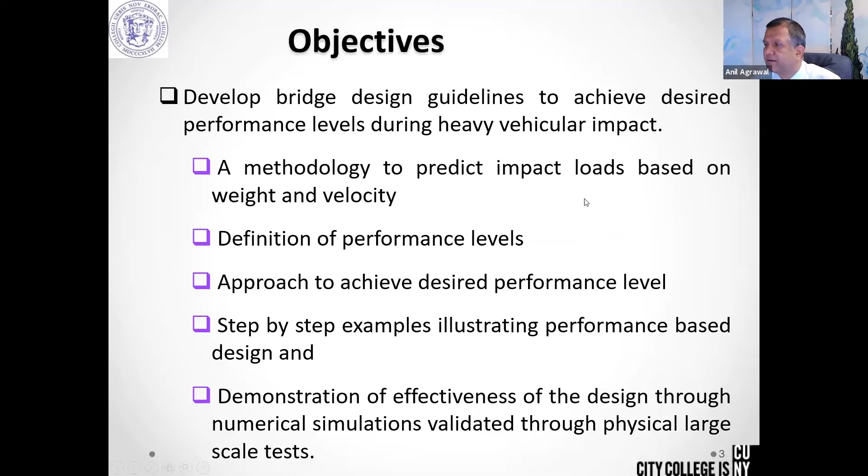But let's look at what exactly the vehicular impact is. So we design the bridges for gravity and live loads. But sometime in its life the bridge is subjected to one of these extreme loads, hydraulic, overload, collision, earthquake, and this may lead to failure of the bridge. Now, if you look at all the causes of failure in USA in the last 20 or 30 years, then of course hydraulics is the biggest one. We do a lot of work on seismic, but there has not been a major earthquake in the US. So damage to bridges because of seismic has been much less actually.

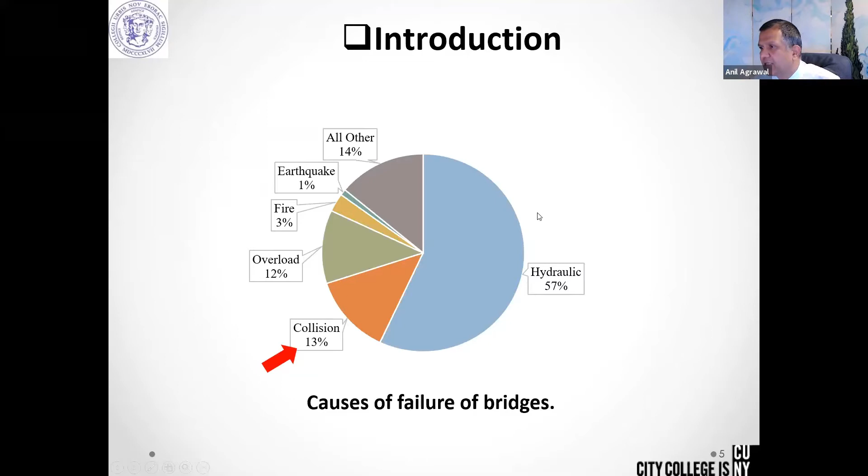All others are 14%, but if you look at the specific cause, then collision, the collapse of a bridge because of collision, is actually one of the leading causes, in fact, prominent causes. Overload is of course another cause, but collision is one of the leading causes of bridge collapse.

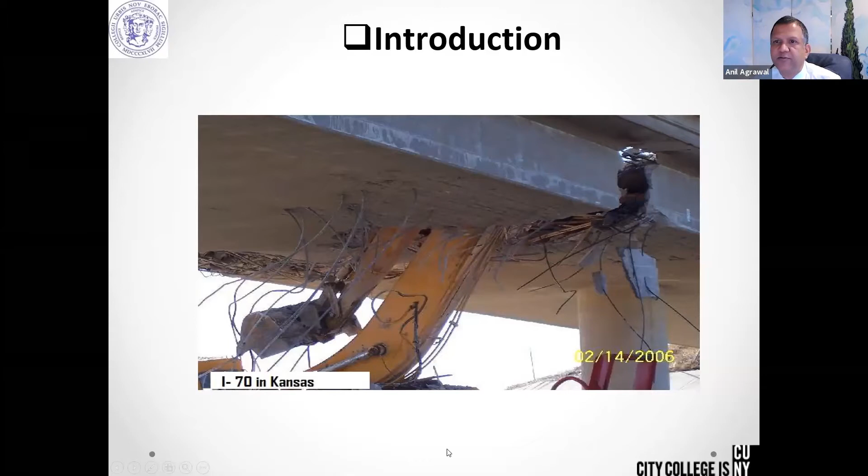So if you really have to cut the deck, this is a good technique. You can just chop the deck from one end to another end. You can imagine the amount of force and effort you will need if you want to really cut the deck. You can see from the top how far it started from one end, almost cutting the deck.

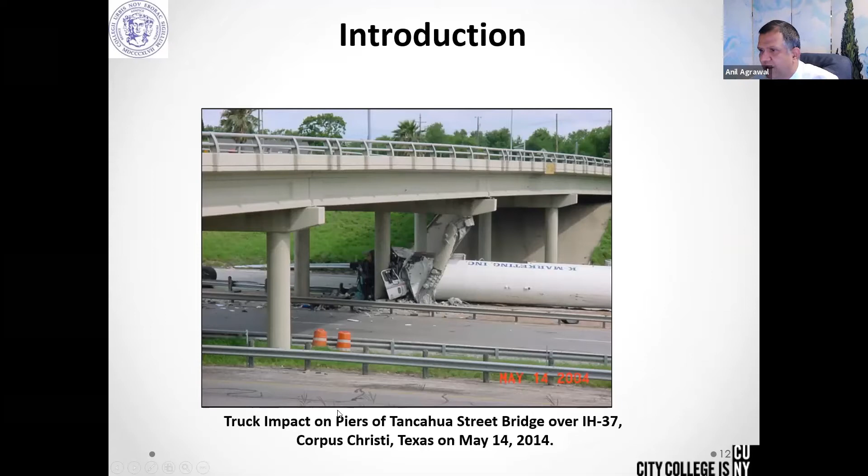Another example where the tanker truck hit the bridge pier. You can see one of the piers is gone, the trucker is gone. Unfortunately, I don't think the driver survived, but the bridge was intact - the bridge did not collapse. It has enough redundancy in terms of continuous girders and other things that it could survive. This was in Texas on May 14, 2014.

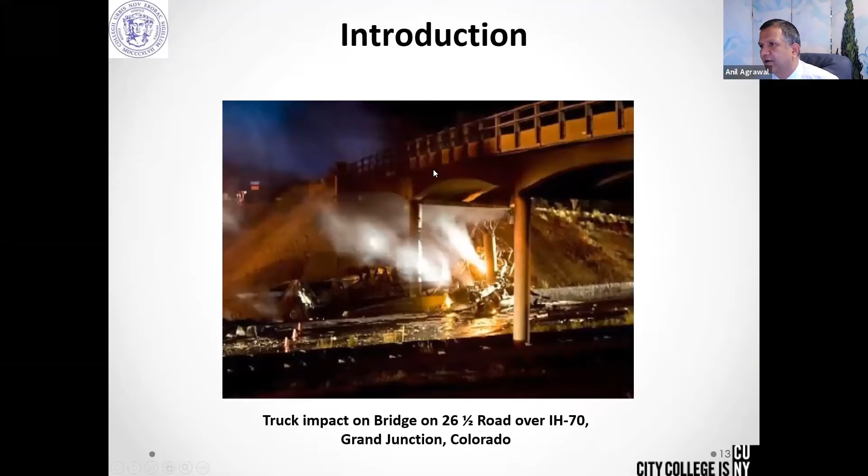This is another example with the fire - the truck burned down. You can see this pier completely damaged, but apparently the bridge has enough alternate load path and capacity that it didn't actually collapse.

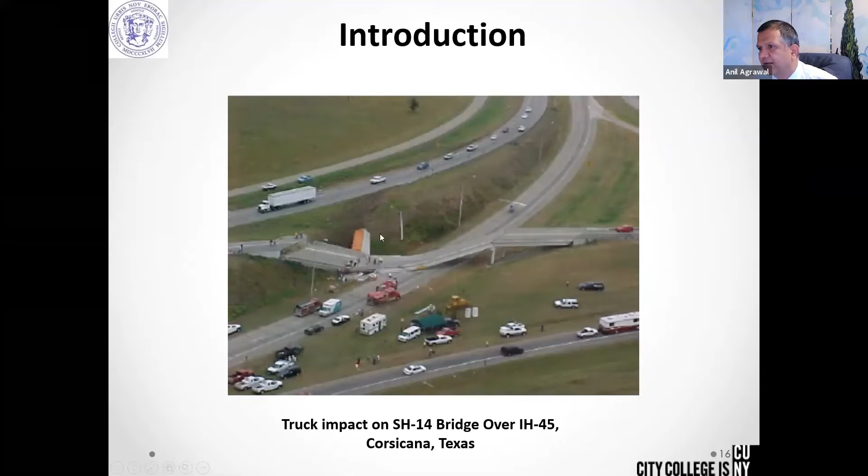Another example in Texas - a lot of these incidents are in Texas where you have high speed and isolated roads. So you can see another example, the truck hit it, and the bridge completely went down.

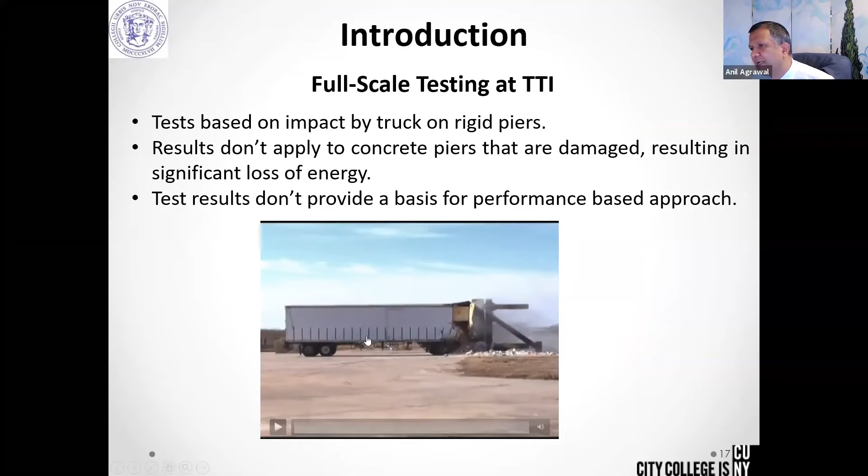To study the vehicular impact, there was a test done at TTI in 2010, and the idea was to find the type of impact force that might come. This truck was actually a tractor semi-trailer truck, but the pier was completely rigid, made of steel. The idea was to find exactly what level of force the bridge pier should be designed for. You can see the two types of impacts.

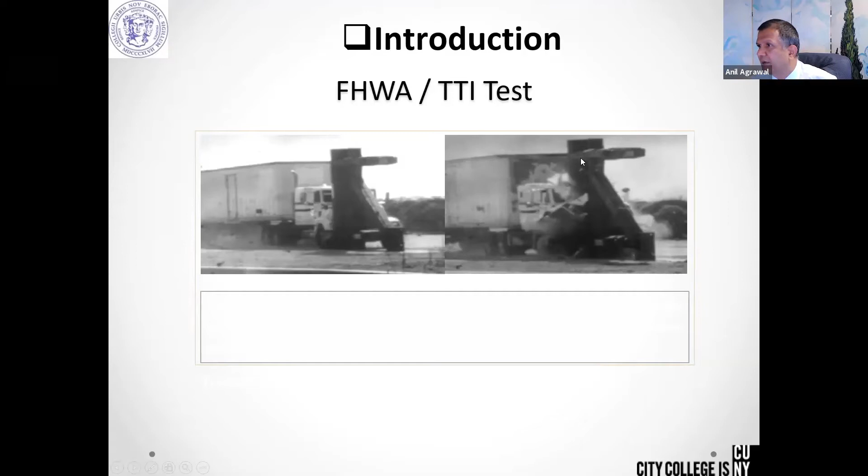First, the bumper impact - the bumper hits the bridge pier, and then once the bumper is done, the trailer comes with 80,000 pounds of force. The speed is low, but the trailer comes and squeezes the bumper and engine between the pier and the trailer. 80,000 pounds, moving very slowly, but really squeezing - applying a massive amount of pseudo-static force on the bridge pier.

Based on the testing, they found some data, applied some filters, and concluded that you can design the bridge pier for 600 kips. But this 600 kips is completely blind in terms of not considering the speed of the truck or weight of the truck or any other factor. It just blindly says design for 600 kips applied at 5 feet height.

In reality, you know that if you have a very heavy truck versus a light truck, or a high speed versus a low speed, the level of damage will be different. If a roadway has a 40 miles per hour speed limit, then there's no reason to design that roadway for a 70 miles per hour impact - that would be an uneconomical design.

So with that in mind, the Federal Highway invited us to work on this problem. I think this was way back in 2014. But before that, in 2012, my first PhD student did his PhD on this medium weight truck. Unfortunately, his work was never published because I had some doubts about the simulation and how accurate it was. There was no clear-cut calibration, so I held on to his thesis and said, well, publish in the future.

So our initial work in 2012 was actually for a medium weight truck, but then starting in 2014, we started working on a heavyweight truck. This is a model of the truck that you saw earlier in the video at TTI - it's exactly the same truck.

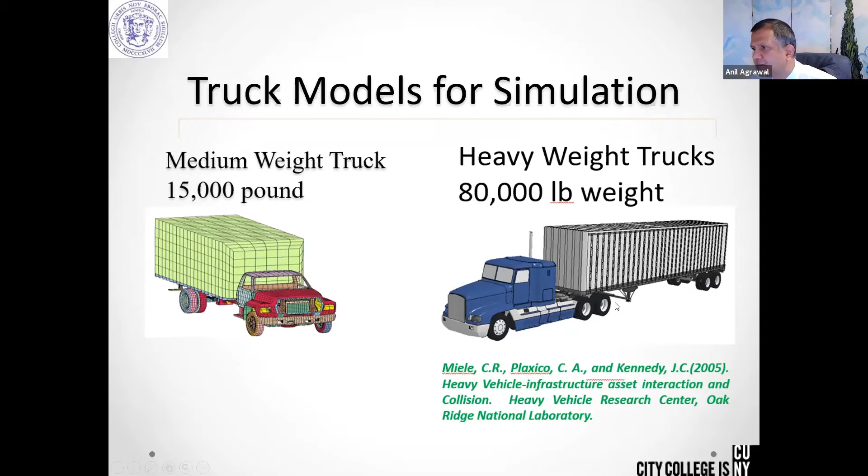Out of that, the primary mode of failure is actually shear failure, the most dominant mode during the accident. This massive amount of shear causes the bridge to fail. If the bridge piers are not designed appropriately for shear, then it will not survive.

We did all the work in LS-DYNA. In LS-DYNA, the material model is important. We use two material models for concrete. We use MAT 159, the continuous surface cap model. This is a damage model where you can simulate the deformation and failure of the concrete. This was developed specifically for this impact problem.

And for the steel, we use MAT 3, which is a kinematic plastic model widely used to simulate isotropic and kinematic hardening plasticity in steel. It considers rate effects again. This cap model also considers loading rate effect. So these are the two models we use.

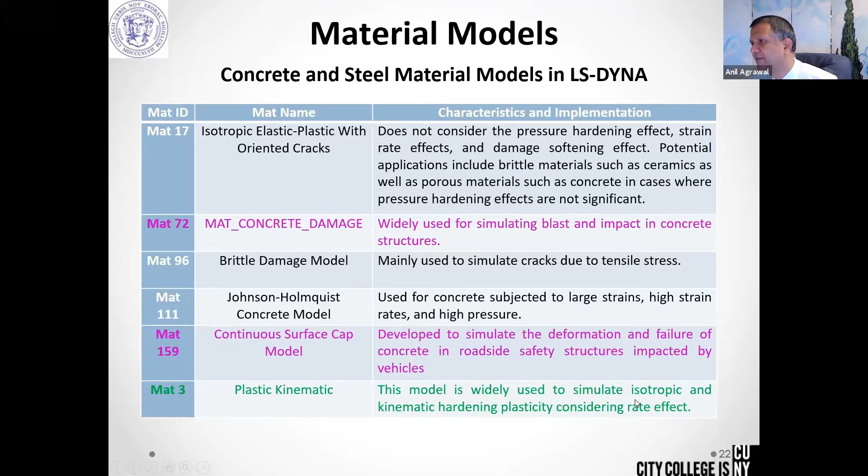We have a lot of calibration for these two models, which I'm skipping in the interest of time. But I want to show you one large scale testing that we did two years ago at the Federal Highway Outdoor Laboratory in Washington, DC. It's called FOIL.

Here, this is a large pendulum system where we built this three pier bent system. The idea was one is weak, one is strong, and we come and impact the pendulum - this is a 2-ton pendulum. We impact the pendulum to the pier, and then see the response. The idea is to take this to LS-DYNA and calibrate and see how well our test and simulation match.

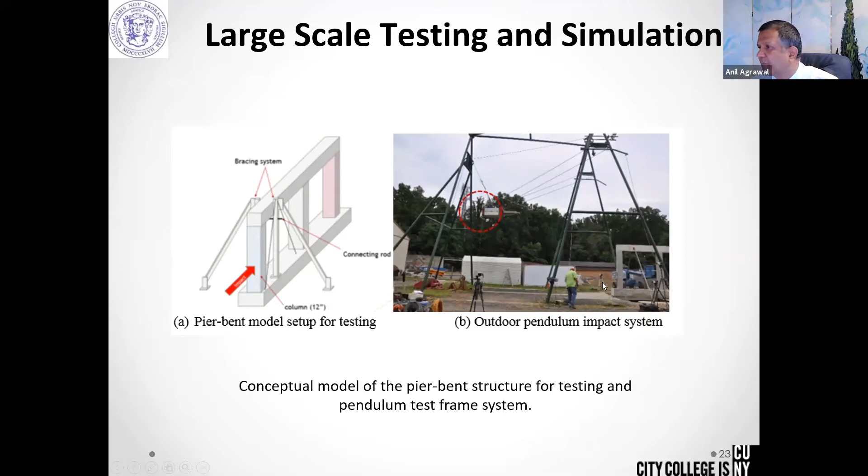There's a paper in Engineering Structures that was published recently. It discusses in detail about this work.

So here, this is the large scale testing and simulation. This is the design impactor. So before designing the impactor, we took this single unit truck and impacted it on the same frame.

So this is the testing setup. We put the testing here, anchoring everything. We also had a lot of strain gauges and high-speed cameras. I'm not showing the result for the strain gauges because some of them in the impact area broke, but some gave very good results. Those are in the journal paper.

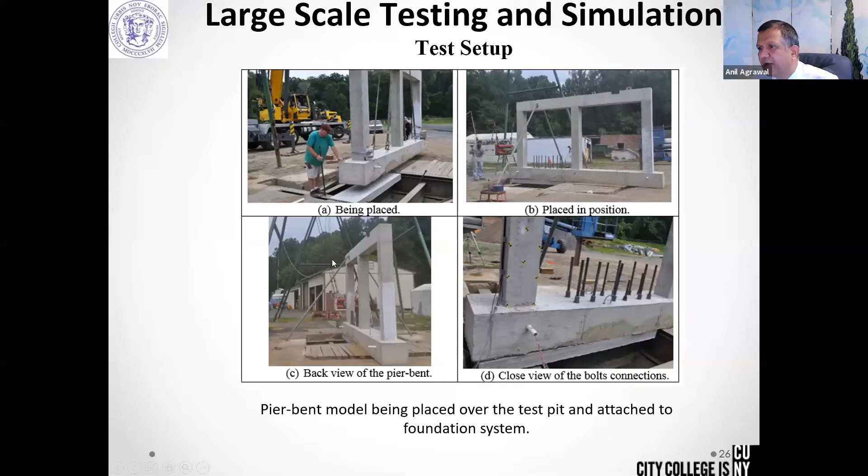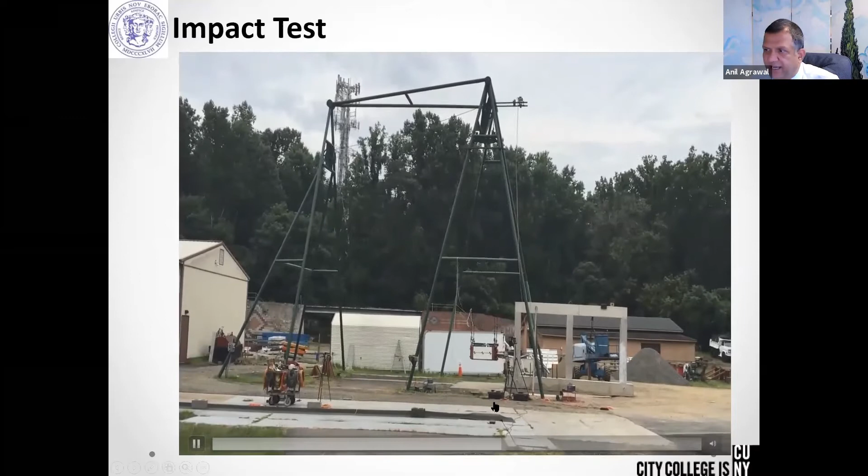But we had a lot of high-speed cameras where we could actually capture the deformation profile exactly. So this is the setup of the field test. When this comes and hits the bridge pier - that is the pier bent system - this was a test costing more than $70,000, two years of work for 30 seconds of action.

But we learned a lot from this one. We took this model back to LS-DYNA. We built the model in LS-DYNA - the impactor - exactly the same way.

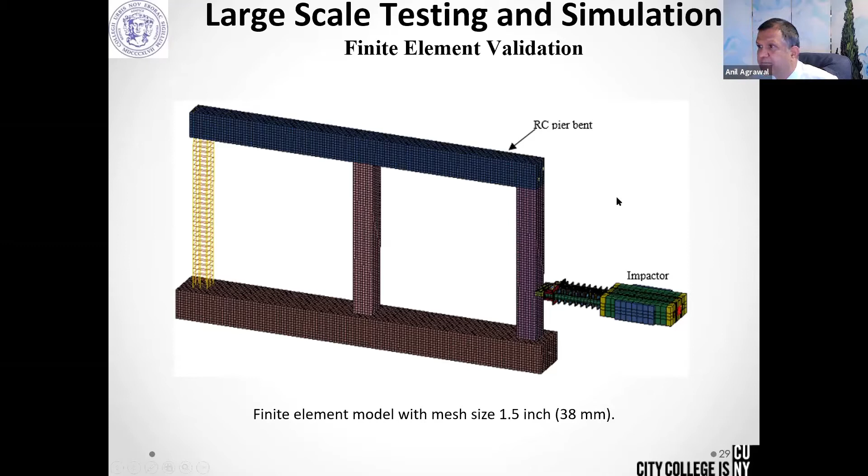And we did - this is the impactor where you have these honeycomb units. This is the nodes. You have the steel mass block. This is point A where we monitor the acceleration. Concrete block - this is the impactor that has been used for many testing scenarios.

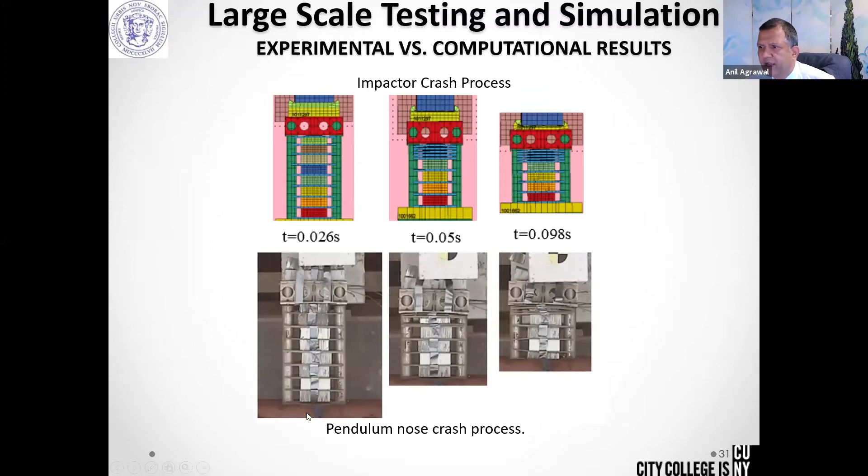First of all, we'll look at the honeycomb behavior. This is the actual honeycomb behavior after crushing, shown at the bottom. You can see how the honeycomb crushed, and in our simulation, how the honeycomb crushed - they're almost similar in behavior of crushing. So that shows that our model is good.

This is the test, the force. We monitor the force by the accelerometer. The dotted line is finite element, and the test is this one. In the test, there is slightly higher level of acceleration compared to simulation, which is understandable because of cable tension and other factors, since we are not exactly modeling the pendulum as it's hanging, the impactor.

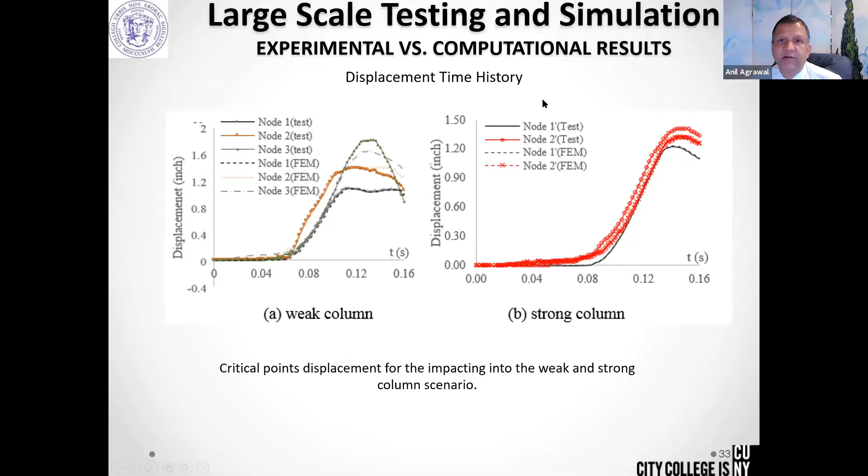But if you look at the velocity of the acceleration point A, it matches relatively well. And if you look at the various points on the model test versus finite element, we actually get very good matching. So displacement time history is matching very well. We get it from the high-speed camera, so that's very good confidence that what we are doing in the finite element and what we are doing in the test is a very good representation.

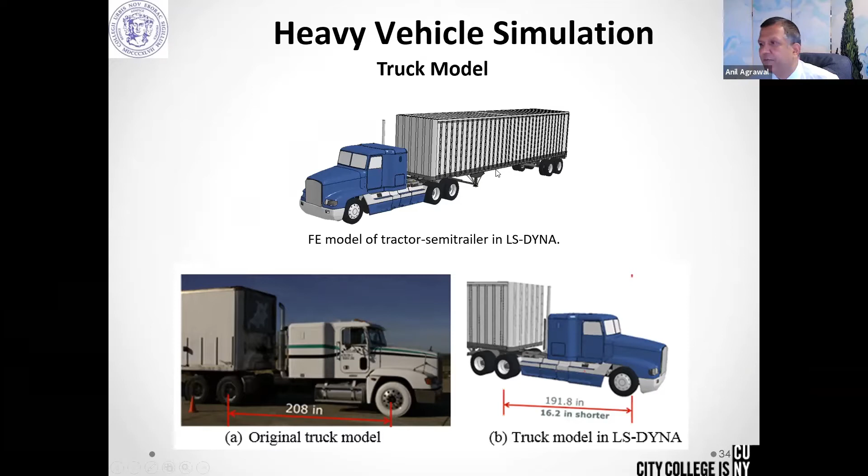So let's come back to the simulation. This is the truck that was used in TTI. This finite element model was built by Battelle through Federal Highway sponsorship. After they built the finite element model, we took over in 2014 for the vehicular impact. So we look at this test from TTI.

You have the bumper impact here in the actual truck, and this is our simulation of the bumper impact. This is the trailer impact, meaning once the bumper hits, the trailer comes crashing and crushes the engine between the pier and the trailer. This is the actual case, and this is our simulation case.

You can see the sand. The trailer was full of sandbags, and sandbags were popping out all over the place. You can see here the trailer is basically broken to pieces. Again, we use the semi-rigid cargo, which simulates the sandbag. If the sandbags were actual, they would have popped out from here. But the damage behavior, tire damage, everything is almost the same.

Then we look at the force time history. This is the total force on the column, on the pier that you saw. With the actual test from TTI, 830 kips of force came here. From our simulation, we have 928 kips of force coming here. So they are pretty close for the engine impact.

After the engine impact, there's a bumper-trailer impact when the trailer comes squeezing. For that, the test gives us around 528 kips, and we are getting around 432 kips. Given that we have the sandbags, which is semi-rigid cargo but not exactly the way it is, because a lot of sandbags burst, and considering the peak force representation and complexity of the testing, that is a very good model — a very good representation of the actual truck behavior.

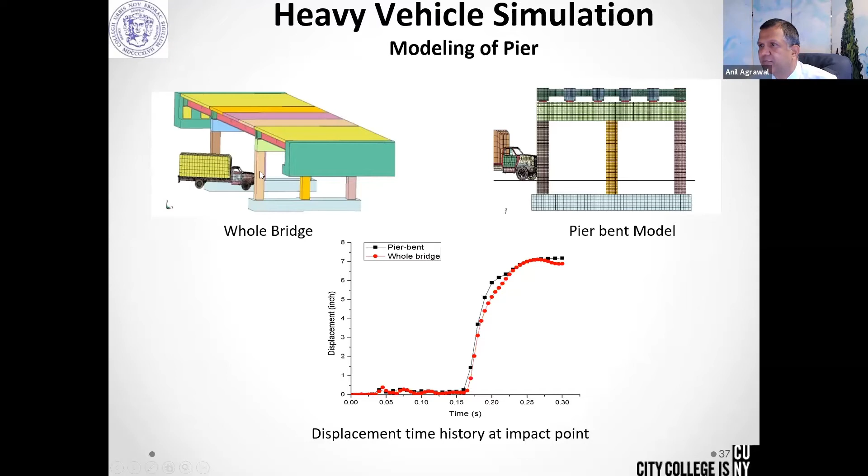So next we look at whether we can simplify further. You have a pier bent, piers with fixed top, and piers with fixed top and bottom. When we start comparing, we find that piers fixed at the top and bottom is actually sufficient, because for this localized impact, the piers actually behave like they are fixed at this point. At the bottom also, with the foundation encasement, they behave like fixed.

So the pier in this impact zone behaves like a fixed pier, and you can see the time history. The zone that matters is from here to here, and this is the point where there's significant damage. So up to this point we are interested; we are not interested beyond this zone. You can see the impact force time history also matches very well. So we come to this model, which actually takes us 4 or 5 hours to run one simulation, which is practically feasible.

So we take this heavy truck model with the fixed pier, and we apply it to different kinds of piers — 24 inch to 42 inch rectangular, and 30 inch to 42 inch circular piers.

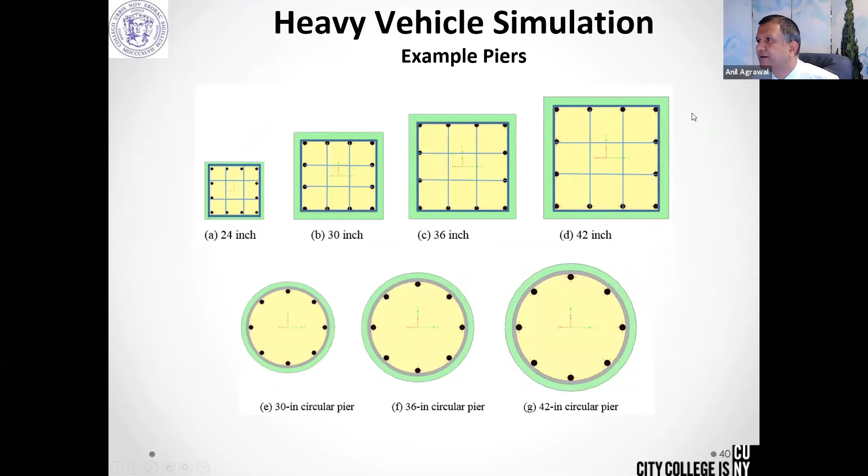These are the most commonly built piers. And then we do the single unit truck, multiple unit truck time history. So let me show you the typical time history. When we do vehicular impact, this was just a representation of time history, how a pulse may look. If you have a triangular pulse like this, we could actually make it like a triangular pulse, just a representation. But if you look at a typical heavy unit truck, this is how the typical time history works.

It looks like this. So the first peak that you see, this is when the bumper hits the bridge pier. And then it goes to the second peak. This is when the engine comes in contact with the bridge pier. Once the engine comes in contact, the engine will apply heavy force, then the engine gets deformed, the force comes down, and then slowly, this is the squeezing effect of the trailer. It goes, and then it comes down here. So this whole portion is the squeezing effect of the trailer on the pier. So you have the bumper impact, engine impact, and the squeezing effect.

What we can do, if you want to develop an analytical model of this time history, we can say, okay, I have one triangular pulse here, I have another triangular pulse here, and this entire area that you see here, we call another triangular pulse. So we can say our impact force time history is like this: one pulse, second pulse, third pulse. Once we have this pulse, then we need to find out F1, F2, F3, F4, F5, and T1 to all these parameters. We also need to find out where exactly to apply this force.

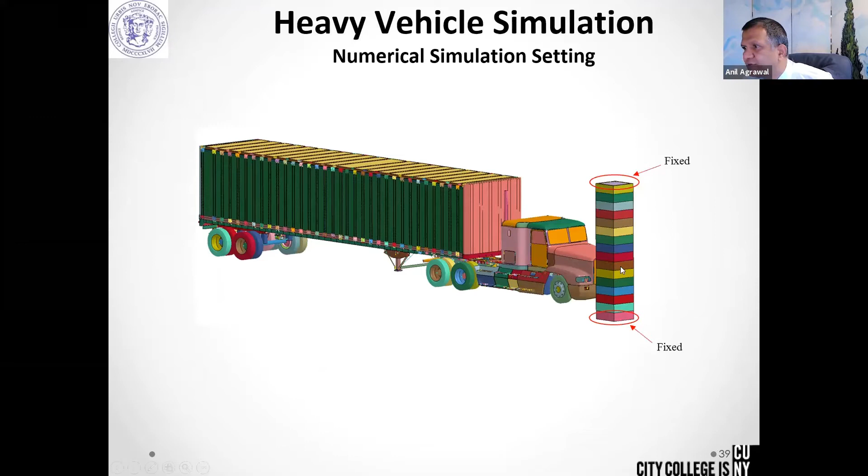On the bridge pier, right? You have a bridge pier. Where do you apply the force? Here, here, here? Where do you apply exactly? Right now, AASHTO gives you 5 feet high, but this is the dynamic force. Where do you exactly apply? So what we do is we do a lot of simulation, and from the simulation, we plot this contour of pier height versus time, and look at, for different velocities and all these things, how the impact force is distributed.

And we see this dark area. This is the bumper impact, the first contact. This is the engine impact area. And this height, that range that you see, this is the trailer impact, because once the engine is crushed, the trailer, because of the speed, will tend to kind of topple, overturn, and apply the force at the lower portion of the pier. So this is the trailer height.

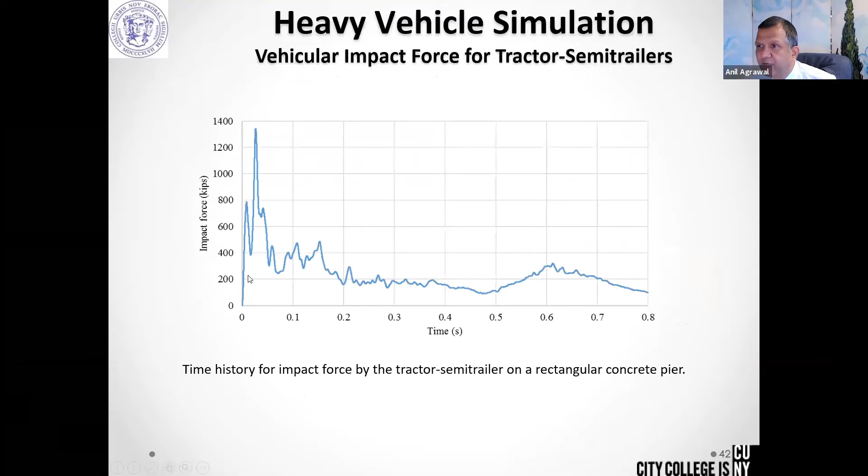So based on this, we define 3 zones. This is impact zone 1, which is your bumper impact. You have impact zone 2, and then impact zone 3 for the trailer impact. So we define these 3 impact zones, and then just to see how good our impact zones are, instead of truck impact, we take this time history, apply it into the 3 zones that I have, and compare that with the actual truck simulation.

This is the truck simulation. This is just the pulse time history that we apply to our model. You can see how good they are. Up to this point, it is almost exactly matching. So that shows that the height and the forces we are applying are actually a good representation of the actual truck model.

And then to find the parameters of these peak forces, F1, F2, F3, F4, we do a lot of simulation, almost 100 cases of parametric simulation for different weight and height combinations, and we have these plots, F1, F2, F3, F4, F5, T1, T2, T3, T4, T5 as a function of velocity, function of pier size, and function of weight. Once we are done with all these things, we go into the complex regression analysis to find the equations for F1, F2, F3, F4, F5. These are the peak forces in the pulse.

For example, if you look at F1, that's the bumper impact. That's a function of velocity only, because the trailer weight really doesn't come into the picture. If you go to engine impact, we assume that most of the weight is considered in the trailer. Engine weight is really much smaller compared to the trailer weight. So you can say again, it's mostly a function of velocity.

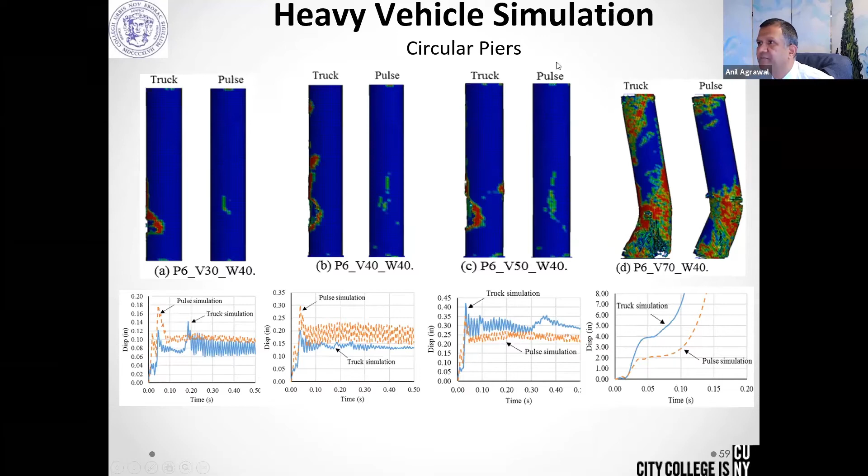In design, we are not going there. In the design domain, we are probably going to stay up to this point. So again, you can see in all these cases, the matching is pretty good. So once we are done with that, then we come to the point of doing what we call performance-based design, where we want to design the bridge pier.

If you look at earthquake engineering, we design for immediate occupancy, we design for collapse prevention. In earthquake engineering, what we do is capacity design. In capacity design, if you take a simple example, you have a fixed column, you apply force here at L/4, which will force it to go to plastic hinge formation. And based on this plastic hinge formation, we'll be able to find that 8Mp/L shear force. The foundation and this part of the pier should be designed for the 8Mp/L shear demand.

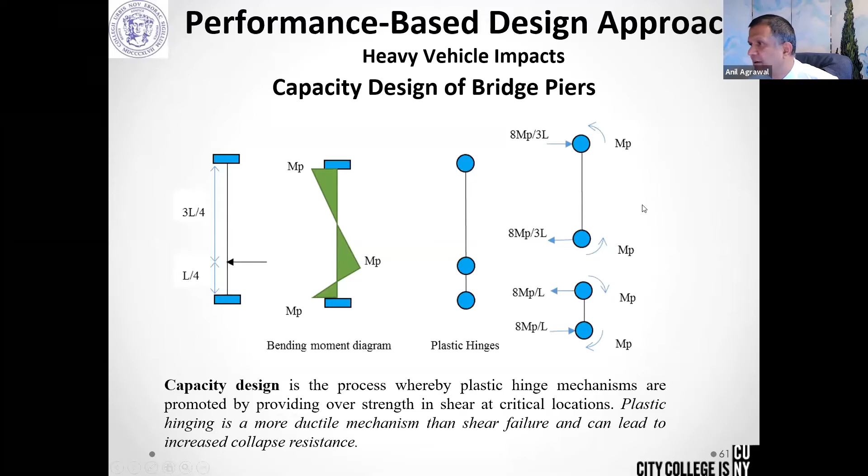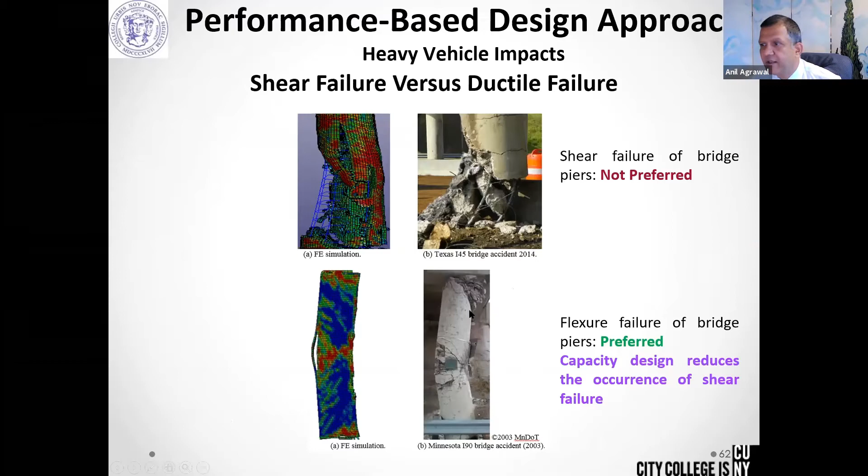So if we know this impact force and we design for 8Mp/L, then we should be able to protect for the capacity, and we should be able to prevent the shear failure of the bridge, which is the dominant mode of failure. So you can see some examples here. This bridge has a shear failure, right? And this one doesn't have shear failure; there's a hinge formation. This is what we want in our design, to make sure that at the point of impact, you have the hinge formation.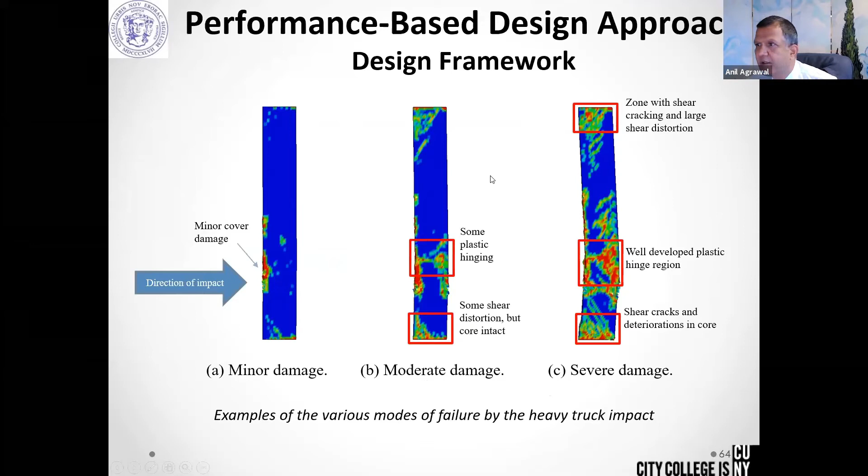So based on that, if you look at the framework, you have the minor damage, you have some plastic hinging, moderate damage, and we want to have shear damage, but still prevent the collapse of the bridge. So what we do is we go into a lot of simulation, more than 100 simulations, observe the damage and convert the damage in terms of shear deformation or plastic rotation. All right. On the x-axis, what we plot is D1, D2.

D1, D2 is, if you remember that pulse we had, we had this triangular pulse. And when we plotted this triangular pulse, the demand for this one, that's D1, D2, and the demand for this pulse will be D3. So what our design approach is that we take the max of D1, D2 divided by the capacity of the bridge pier and plot it.

And you can see very nicely that you have zones. This is the minor damage zone. This is the moderate damage zone. This is a severe damage zone. But when the engine impact comes, D2 is engine impact. After the engine impact, the pier gets damaged. Concrete is cracked. Concrete is no longer useful.

Then what comes is the rebar detailing, which plays the role. So we look at the D3. And when we look at the D3, we just look at the shear capacity of the rebar cage, not the concrete. And again, you can see we have very nice 3 zones of damage.

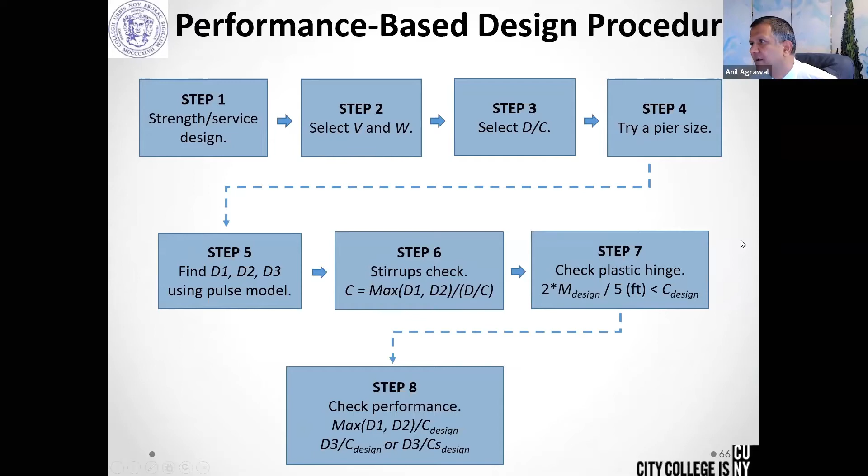But the same bridge pier, if we go with our approach, all right, this is the AASHTO design at 70 miles per hour, and this is our performance design. See the pier impact, no plastic hinge formation. What exactly is the difference? Well, longitudinal rebar is the same. Everything is the same. The difference is the stirrups, the confinement.

AASHTO required number 6 at 12 inches spacing. We are saying number 6 at 6 inches spacing. Such a minor difference in the stirrups, which will be only a very small fraction of the cost of the material, and you can achieve this performance. So that says that if you follow this kind of approach, you'll be able to protect the pier even at a speed of 70 miles per hour.

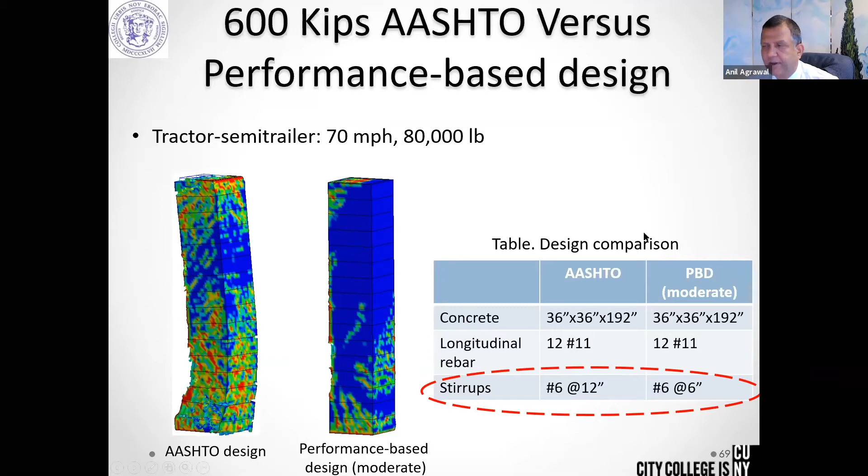And it gives you, if you look at the charts, you can actually predict where you want to be, where you want to design, and where you want to stay. So that's the part of our performance design that we worked on.

The next slide, I want to talk briefly. I have a few more slides on over-height impact on bridges. So I'm pretty sure you guys remember the Skagit River Bridge. So I'm starting from there. The Skagit River Bridge, I think in 2013, the bridge collapsed. This is the Skagit River Bridge in Washington State.

This truck came with this oversized combination vehicle, the trailer, this is a semi-rigid trailer. The trailer came and hit the bridge at this point. When they hit the bridge at this point, one span of the bridge collapsed in the river. So let me show you. This is the span of the bridge collapsed in the river. There were a number of vehicles and people that fell in the river, I think in the range of 10 or so. But fortunately, nobody died. Everybody was rescued, but the bridge span was damaged and the bridge had to be replaced later on.

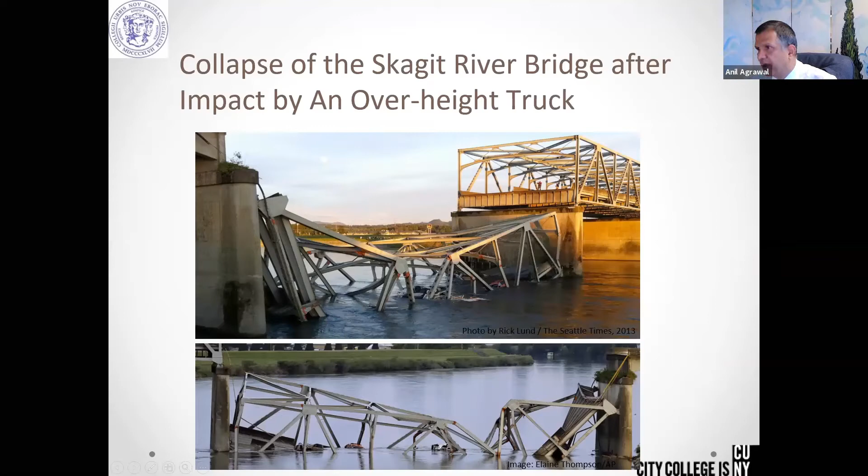We used again our similar truck model that I showed you already, and we built the model in LS-DYNA. We had to go through a little bit of iteration in terms of rigidity of the truck model. We didn't have test data, but we were trying to figure out how rigid the model is. If the trailer is very rigid, it will cause a lot of damage, but the truck will not get damaged. If it is not rigid, the truck will get damaged, no damage to the bridge. It was somewhere in between. We wanted to replicate this level of damage to the truck as well as the collapse of the bridge. We wanted to do both. So it went through several iterations because there was no data available on the truck behavior.

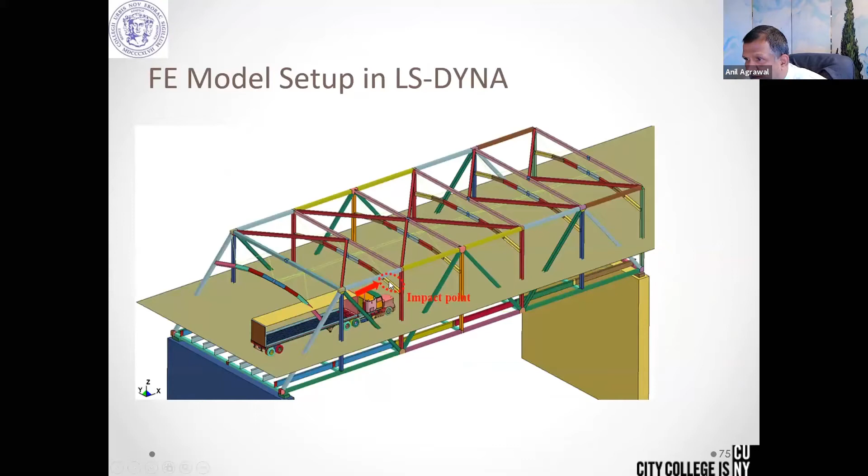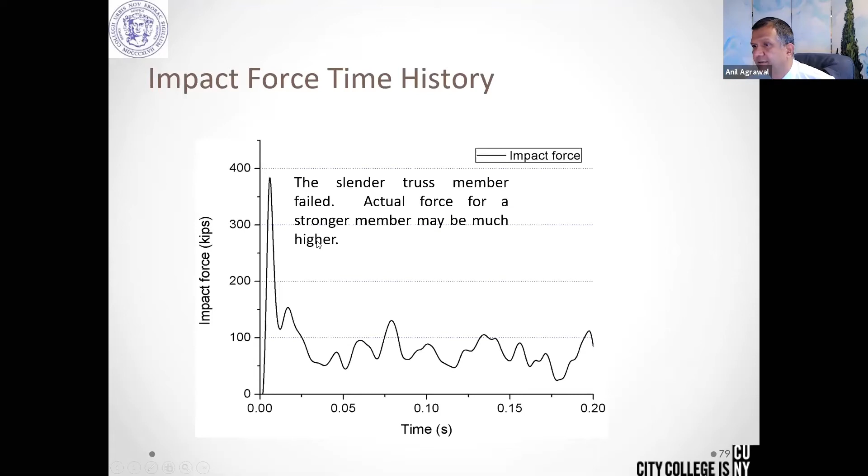If you look at the force in the member when the truck hit this member here, this lateral brace member, the force in that member was actually close to 400 kips. Now, those members are not designed for a lateral force like this 400 kips. And the reason the bridge collapsed was because it was simply supported. So the entire span was actually dragged off the support into the river.

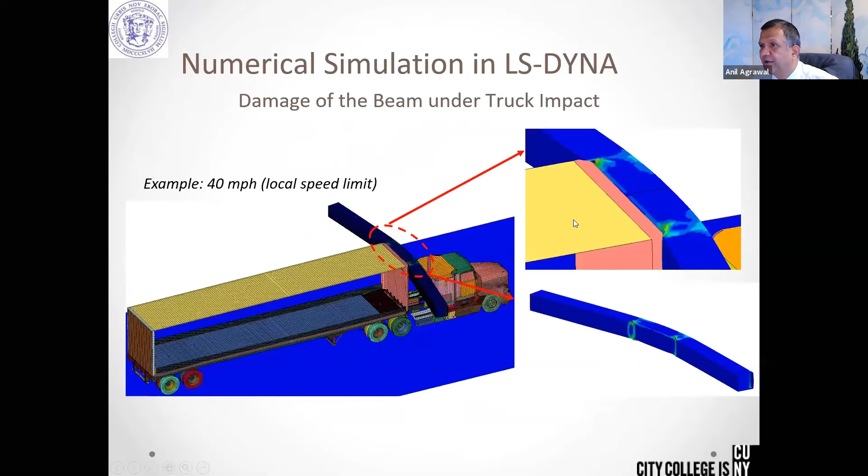And then we went on to modify this original girder, which has a 2-inch plate. We modified it to a 4-inch plate. With the 4-inch plate, we can change the beam design for a 40 mph rigid cargo impact to the point where it will serve its purpose. It will not get completely damaged. It will prevent the truck from entering the bridge or tunnel. But after the impact, if it is severely damaged, then it may have to be replaced.

Again, if you look at the peak force in this case, it's a rigid cargo, only 40 mph speed. You have 2600 peak force. So the idea of talking about these numbers is to give you a feel for the range of forces involved in this kind of impact; the magnitude of force is simply too high. So one approach is, of course, to design these members to be strong enough, but the other is to design redundancy so that if there's an impact, the bridge doesn't collapse and you can repair those members.

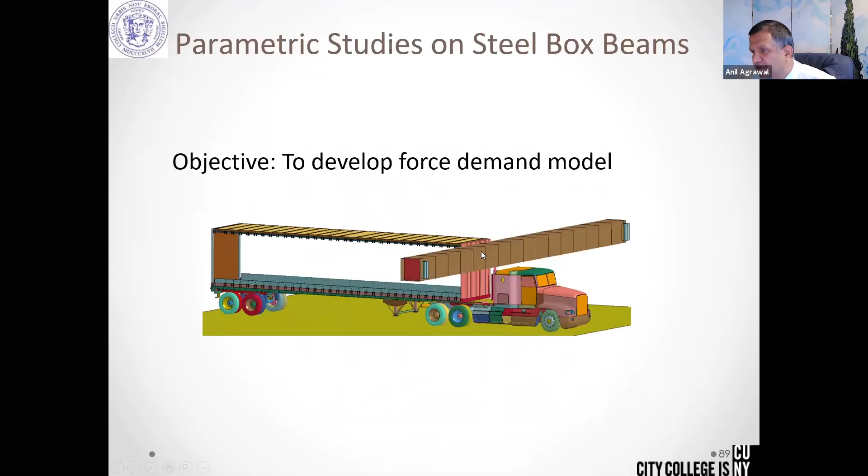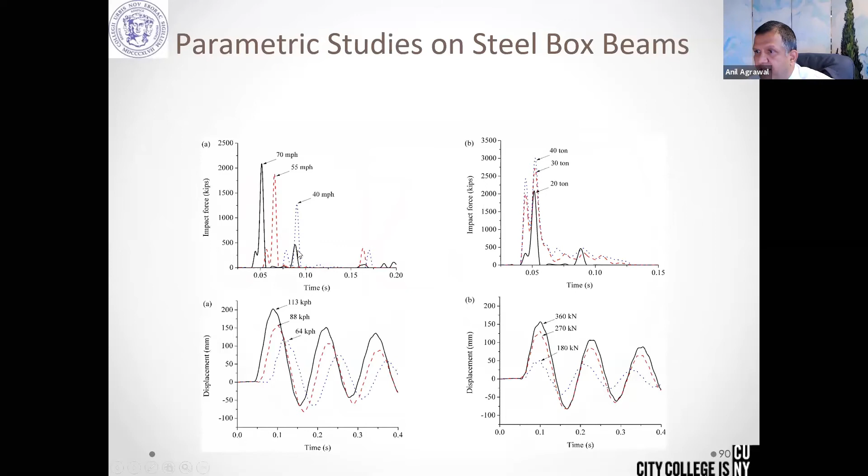We also look at some parametric model of how you could design a model for the steel box beam. We did this by the simulation, but you can't do this complex simulation all the time. So what do we do? Well, we do the parametric study, and then we realize that the force acting here on the box beam is actually a triangular pulse. All these are different speeds and weights. They're all triangular pulses. So what we do is we assume it is a triangular pulse.

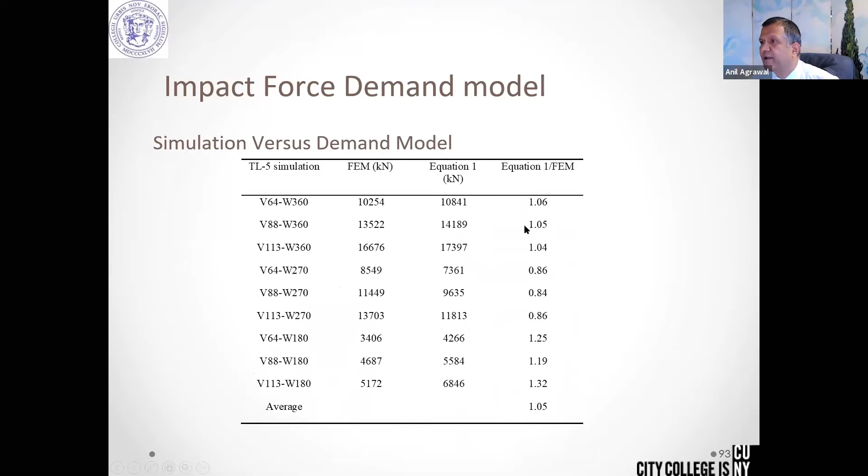Again, this is a simulation versus impact. They are within 15% plus minus, 20% plus minus, which is good enough given that kind of complex situation we have. We also look at a lot of damage to concrete girders which are impacted. This is one example for a pre-stressed concrete girder where the truck goes and hits the bridge. You can see this actual impact here. The girder is damaged. You can see this girder damage.

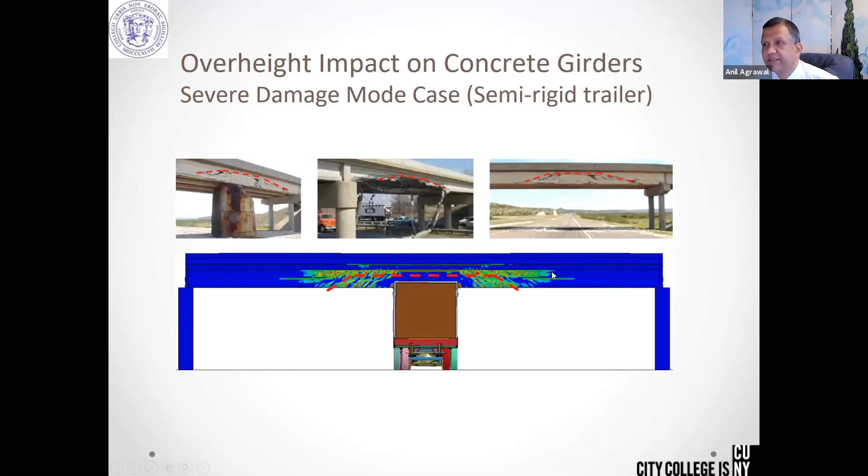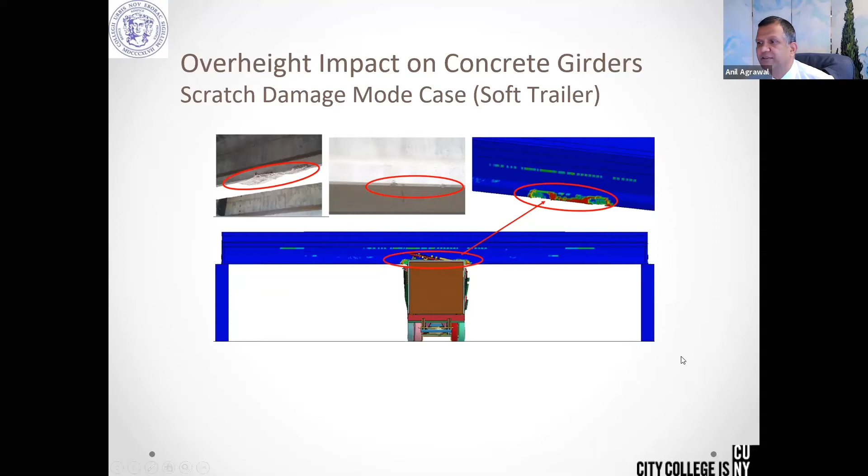And from our simulation, you can see the line of damage that we are matching on this girder, this W-shaped red line. And you can see how the girder is getting damaged. Our simulation result, again, was for the semi-rigid trailer. But if you look at the soft trailer, then there are some minor scrapes here. And the same thing we see in our simulation, there are some minor scrapes on the girder. So again, we are able to match very nicely.

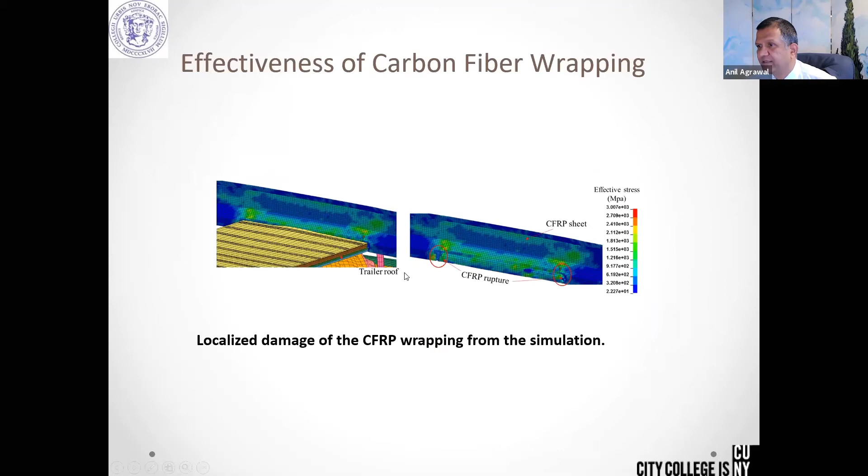Sometimes people do fiber wrapping on the girders. So we were asked by Federal Highway, how good is the fiber wrapping? We said, okay, let's simulate fiber wrapping. So we take this girder, we put the carbon fiber wrap here, and then we do the simulation. This is the damaged fiber wrap girder. This is our damage here. You can see the diagonal cracking in this zone. And if you look at CFRP rupture in this zone, that's where the CFRP rupture is. So we are able to match again with what really happened in the field.

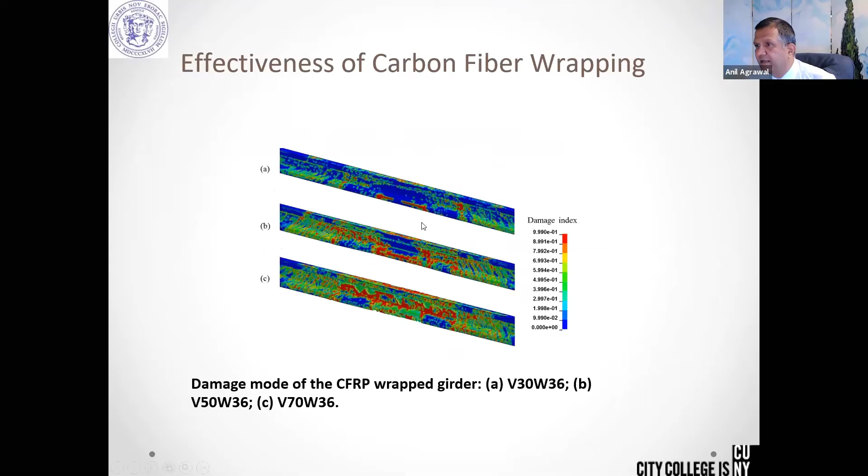And if you look at the effectiveness of CFRP, this is without CFRP, and if you increase the thickness of CFRP, there's a certain point, but you cannot completely eliminate the damage. There will be permanent deformation to the girder. You can reduce from almost 13 or 14 inches to half of that, around 6.5 inches, but still the girder will be damaged significantly, and you have to either rewrap or replace the girder. So that's our fiber wrapping. It works, but it doesn't really work completely.

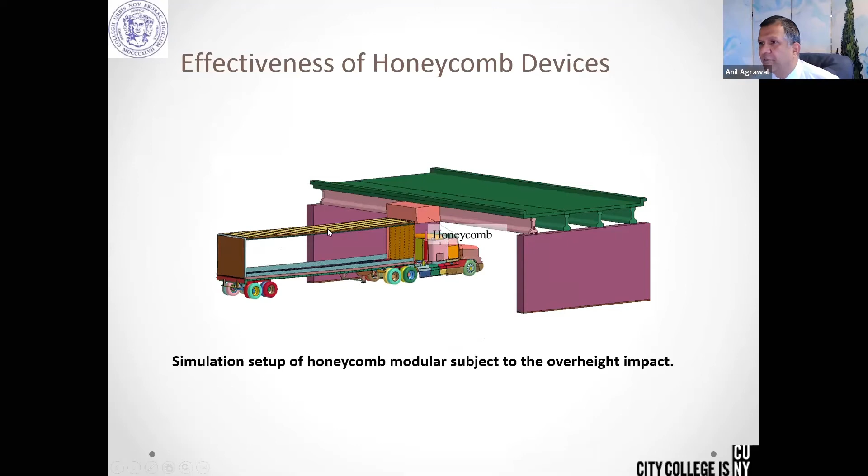And then we are looking at another measure. We are designing a protection device. It's a part honeycomb, plus other components, and our patent is pending for this impact protection device. Here I'm just showing a very quick result. With CFRP protection, no matter how much you did, as the weight of the truck increases, your damage will be 180 millimeter maximum permanent displacement. And when we have a honeycomb, we can literally completely prevent the damage to the girder.

The idea in our device is that when the truck comes, the honeycomb with some other supplemental components is able to take the shock and dissipate it quickly through damage to the honeycomb and compressed air which is released. So we take all the shock off from the impact and prevent any damage. And our mechanism prevents any significant transfer of forces to the actual girder. So you can see that honeycomb works very well. In fact, later this week or maybe next week, we are doing large scale testing on this honeycomb to see the effectiveness.

And if we get the same result as we are getting in the simulation, then we'll go to the next phase where we'll do testing on the large scale base with the actual truck impact. If that works out, we'll have an effective solution to prevent damage to bridges and overheight bridge girders, which is a significant issue as almost every state in the country has bridges impacted. The DOTs, Department of Transportation officials, will have the option to install this device to prevent any significant damage to the girders.

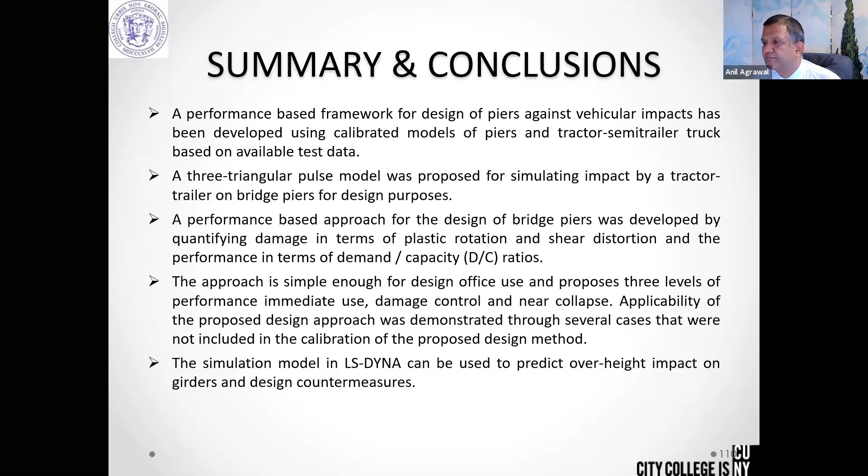The maximum bridge response would occur in phase 1, when the loading is still applied, or in phase 2, under the free vibration. Well, it's like this. Let me go back to the pier impact and show you the time history so you will know exactly what is happening.

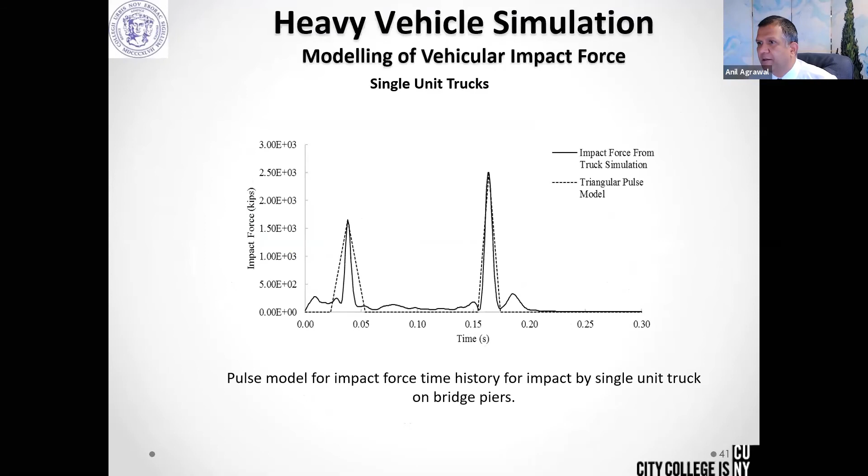If you look at this good example, you have this truck simulation, and you can see this goes, and this is the bumper impact, where the force starts and the displacement starts increasing. This is the point of contact where the bumper touches the bridge pier, and it goes to the engine impact, which doesn't do much. Then comes the trailer. If you look at our pulse model, you have the bumper, the engine, and after the engine, the trailer, which is the massive force.

This is the squeezing force, an 80,000 pound truck weight. Imagine applying an 80,000 pound static force on the bridge pier. It's not free vibration, it's a static force which applies and keeps on increasing for up to 0.8 seconds.

So if I come back to my chart here, it goes to this point, and then from this point on it goes into free vibration. So the major amount of displacement, the major damage, will actually occur when you have this squeezing force.

So what may happen is if your speed is very high, under the engine impact, the pier may get cracked, completely damaged. Pier may collapse depending on the speed and weight, but if the pier has not collapsed, this part will come and finish the story. It will cause the collapse of the bridge pier.

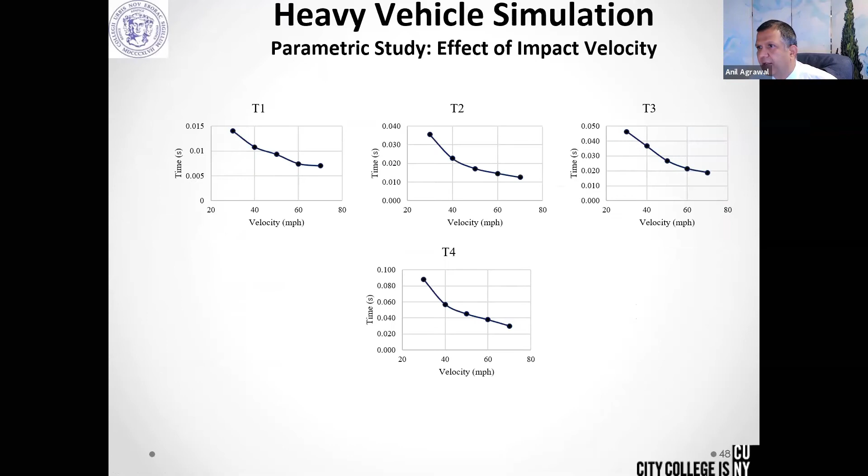Again, if you look at our pulse model, we say our pulse model goes up to 0.8 second, right? This goes up to 0.8 second. But in our actual simulation, when we do it in LS-DYNA, we don't go up to 0.8 second.

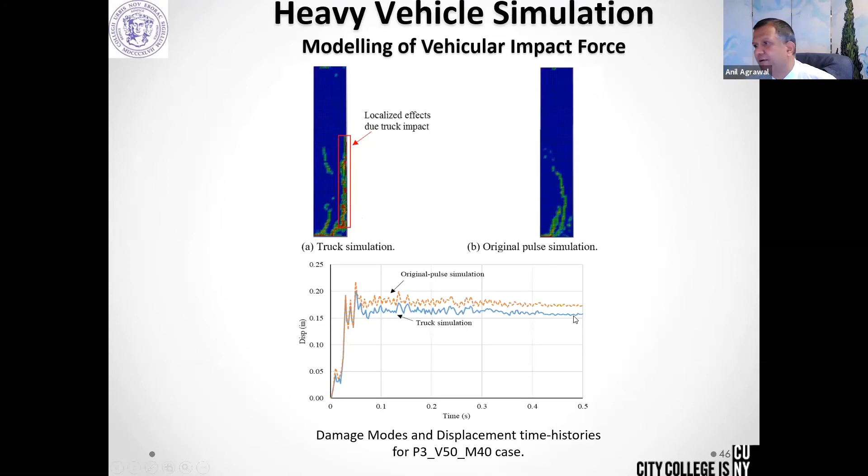Because we see that the squeezing force is applied, but at this point there's a permanent deformation of the bridge pier, and the speed has gone down. So we run the simulation up to some point, then stop, because LS-DYNA takes a lot of time. To minimize computational cost, we cut the simulation when we see the results are stable enough.

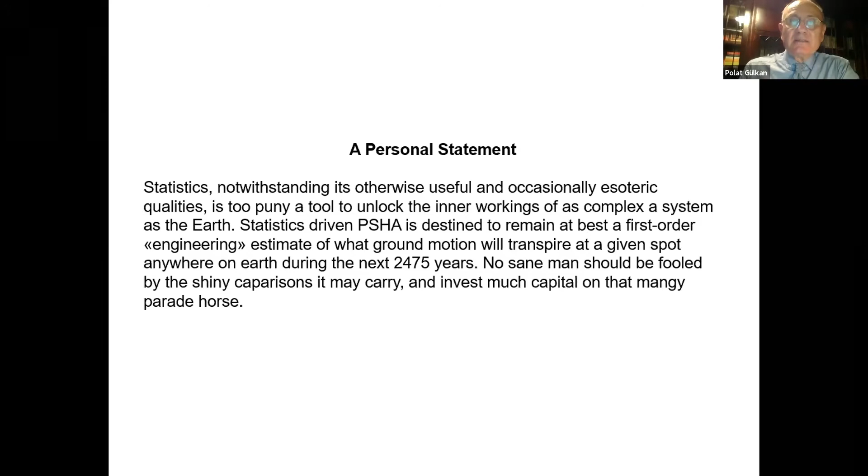However, unless we make use of the more fundamental laws of nature, I think that the error margin represented by the standard deviation will not diminish in the near future. And therefore, there will always be a margin for error, and therefore we should be sober enough and modest enough to admit that the statements in relation to the 2475-year return period earthquake, or the effects and damages that it causes, are bound to be shrouded in a lot of uncertainty and possible future errors. Therefore, statistics is fine, but it's not sufficient and it needs to be perfected.

Now, the motivation for this presentation derives from the age-old problem. We build, we design, and analyze structural systems, which sometimes are subjected to earthquake ground motions, and occasionally to strong and very strong earthquake ground motions. Now, the engineer's duty, of course, is to make sure that the safety of the occupants is guaranteed through non-collapse, that the safety of the public is protected by the designs that we submit to the community at large.

Now, are we endowed with enough confidence to make sure that the safety of the public, the safety of the built environment, is guaranteed by our design? Well, each earthquake teaches something new, which is, of course, the way in which science and technology have developed until now.

And we should not shy away from making admissions at times when it is called for, that we learn from our past mistakes, we learn from the lessons that earthquakes teach us, and therefore we can only perfect our tools by making use of the lessons that we have learned from nature.

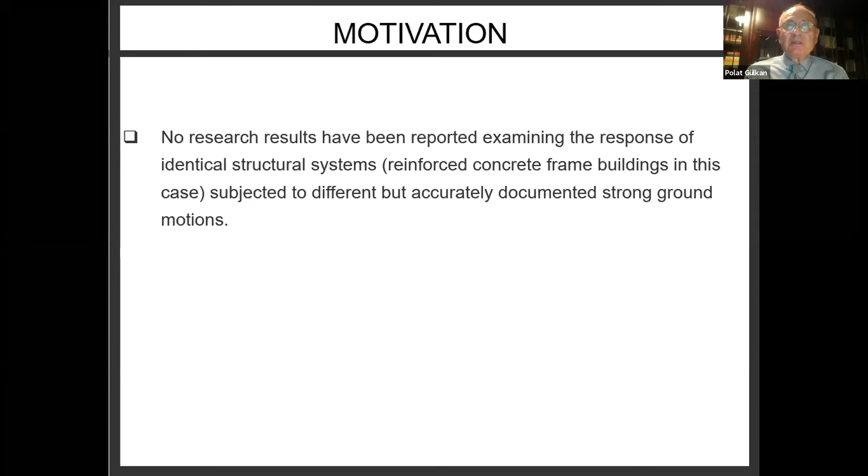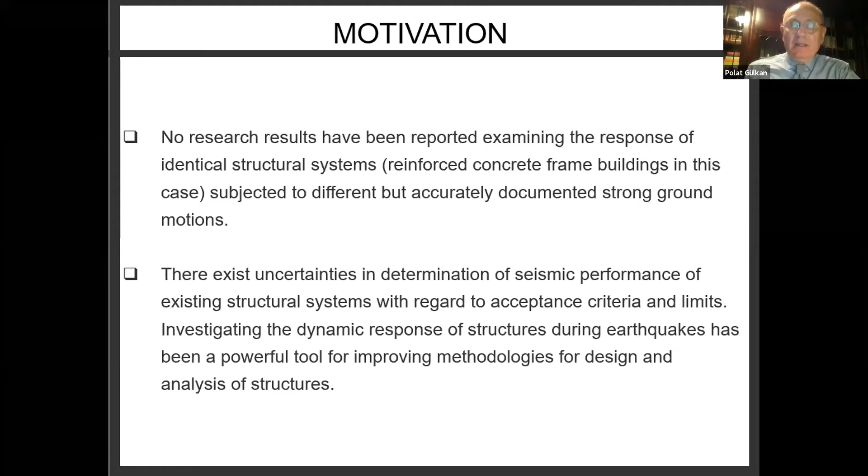Well, this has happened in a sort of a roundabout way in Turkey during the course of the last 30 years or so. And I think that there are lessons for all of us to derive from this experience. This is what I propose to pass on to you tonight. All of them deal with the performance of these identical buildings.

Now, on a lighter note, perhaps we should remember the experience and the teachings of a gentleman, probably a mythical person named Procrustes. The fame or the infame, if there's such a word in the English language, derives from the fact that he was a stickler for precision and exactness. Now, he would offer tired travelers in ancient Greece, who would be traveling from one city to another city on foot, and of course the travelers would be tired by the time night fell, and Procrustes would offer them his bed, which of course the travelers would be only happy and grateful to accept.

However, there was one condition on the offer that Procrustes made. The person, the traveler, needed to fit the bed exactly, not a centimeter longer and not a centimeter shorter than the length of the bed. When the traveler failed this exacting test, he might well lose his life. Therefore, the Procrustean estimates are sometimes taken to mean estimates that are made with hindsight and not necessarily foresight.

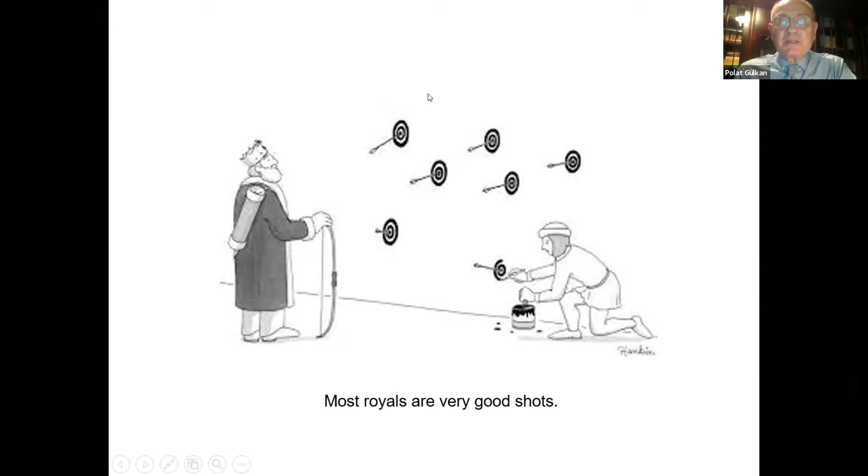This is a cartoon that depicts how a royal person, possibly a king, proves himself to be a perfect shot.

Now, one possible exception to a single building experiencing multiple strong ground motions is the hotel building in Van Nuys in California. However, this building does not quite represent the experience that I'm about to relate to you. The building was retrofitted after the 1971 San Fernando earthquake. It was subjected to a strong ground motion in 1994 during the Northridge earthquake. But the building had been retrofitted, and therefore it was not the same building, not the same structural system. And a lot has been learned from the experience of the Van Nuys.

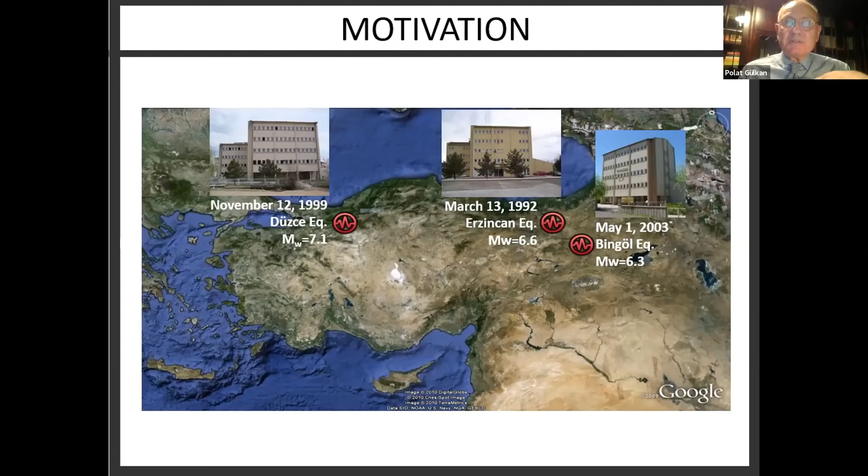Now, the ministries have built facilities in various provinces where the provincial services with which that ministry is charged are carried out. Now, the particular property of these buildings is that the ministry places their strong motion stations near the same building. So we know exactly the ground motion that those buildings experienced, except the one in Erzincan, 1992.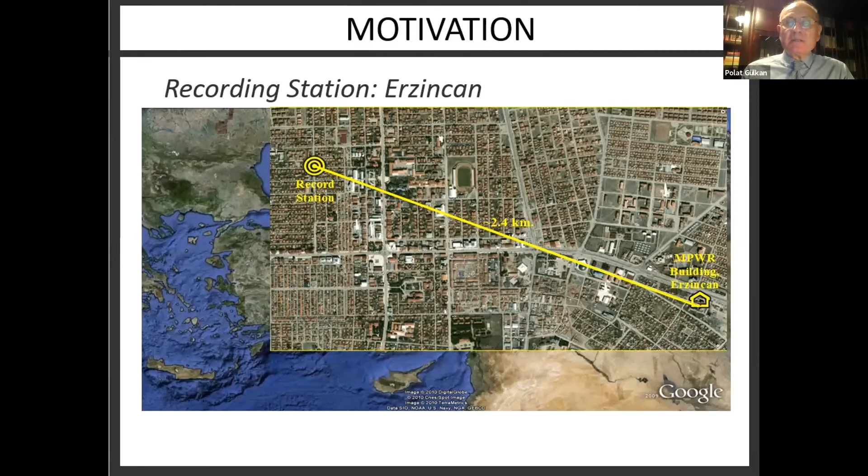The distance between the building and the recording station on identical local geological conditions was 2.4 kilometers. So we will make the simplifying assumption that the ground motion in Erzincan was what the building experienced. The objective is, given the benefit of hindsight, could anyone have predicted the response and the damages of these buildings?

Now, the instruments were on the ground, adjacent to the building. There was no instrumentation at all in any of the three buildings. So we don't really know what drifts, what motions the floors of the buildings underwent. But we do have extensive recordings of the damage. And damage perhaps is one way of going back and making reasonable estimates of the forces or drifts, displacements and strains in those buildings.

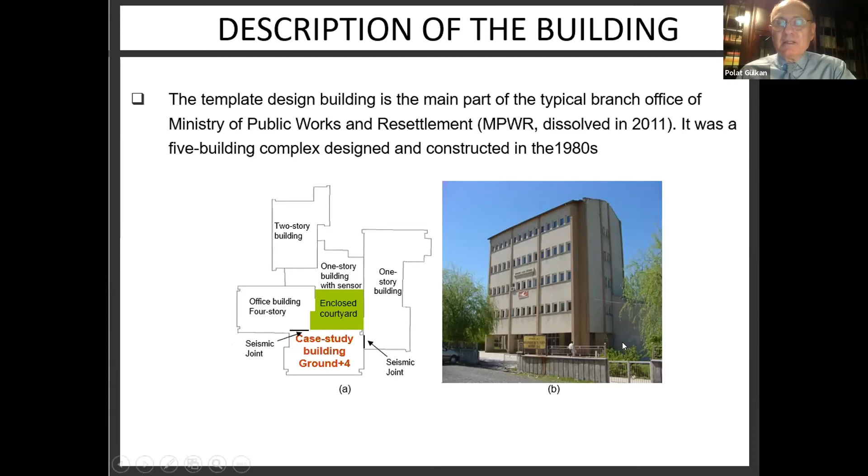Now, the typical building is shown here. It's ground level plus 4 regular stories. There are usually adjacent buildings, but this building, the one that is marked in red here, was identical in all of the 3 cities. No shear walls, but oversized L-shaped corner columns existed in all of them. The rest is regular moment resisting frame. And here it is.

All right. Here are the material properties that were retrospectively established. The ground motions were pretty severe. In 1992, the 2 components were of the order of 0.4 to 0.5 Gs. In 1999, they were of the order of 0.75 to 0.8 Gs. And in the year 2003, they were of the order of half a G in one direction and 0.28 Gs in the other direction. And the other indicators of the ground motion are listed here.

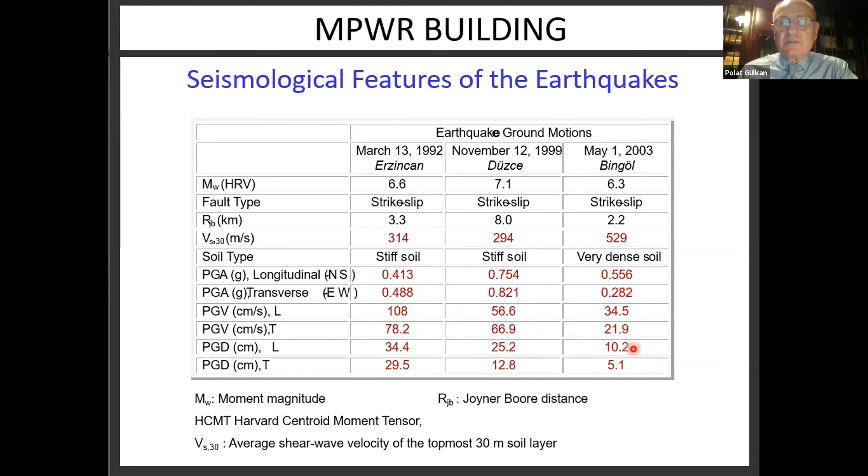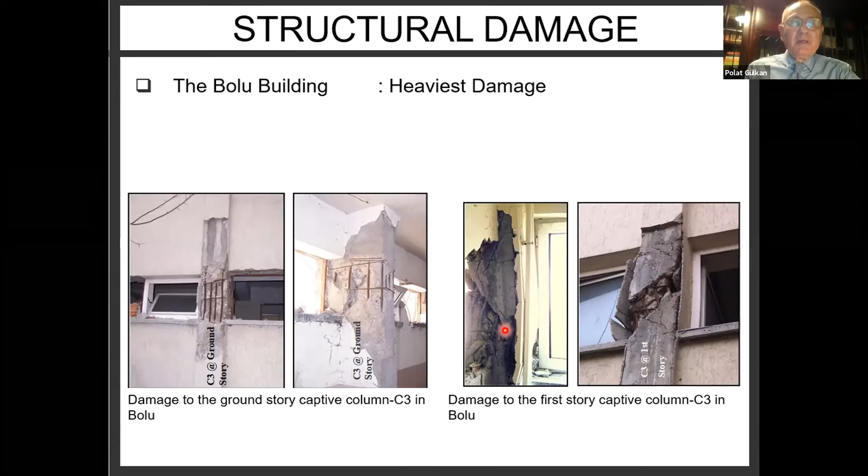All of them correspond to pretty strong ground velocities, which is, of course, the driving parameter of the ground motion in causing damage. Well, the heaviest damage took place in 1999. These are captive columns at the end of the transverse interior frame, and they were all sheared. No ifs and buts there. But I think that a strong case could have been made for the fact that these were captive columns, increased shear, etc.

The ministry took the contractor of the Bolu building to court. The court case dragged on for a number of years. I think that the contractor was not guilty in terms of negligence. He built what was given to him. The response of the building was more or less what could have been expected of 0.8 G ground motion damage, and the building stood, no loss of life. And still the ministry, not to be blamed for using a heavily damaged building, at a later date decided to pull down the building and replaced it.

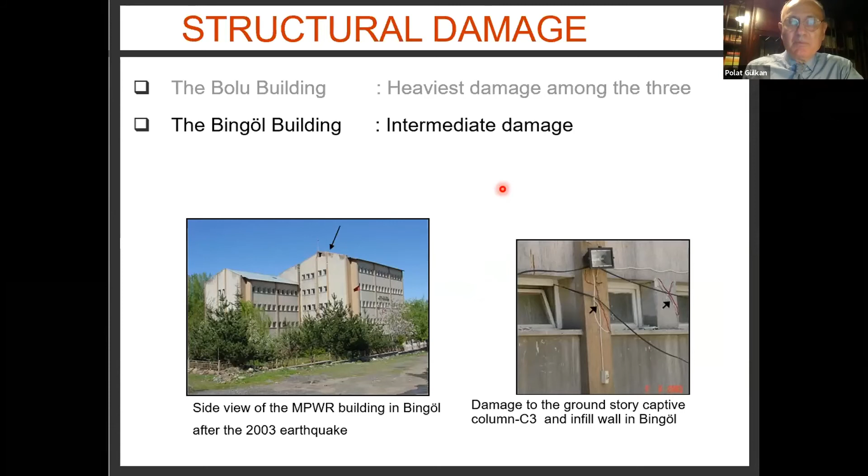And the Erzincan building, the one that experienced 0.5 Gs, seemed to experience the least severe damage. Now, we then went to the arsenal available to earthquake engineers, pulled out all the weapons, given the ground motions, given the material properties, given the building sizes and dimensions and so on. The expectation was that we could more or less predict the observed damages in all of these buildings.

Of course, the columns were all shear sensitive, so we made an estimate of the shear capacity of the columns, given the response, given the forces, the drifts at the tops of the ground level columns. It is reasonably possible to estimate the moments from the drifts and from the moments the resulting shears in all of them. And does that shear correspond to the damage that we visually observed in all of them?

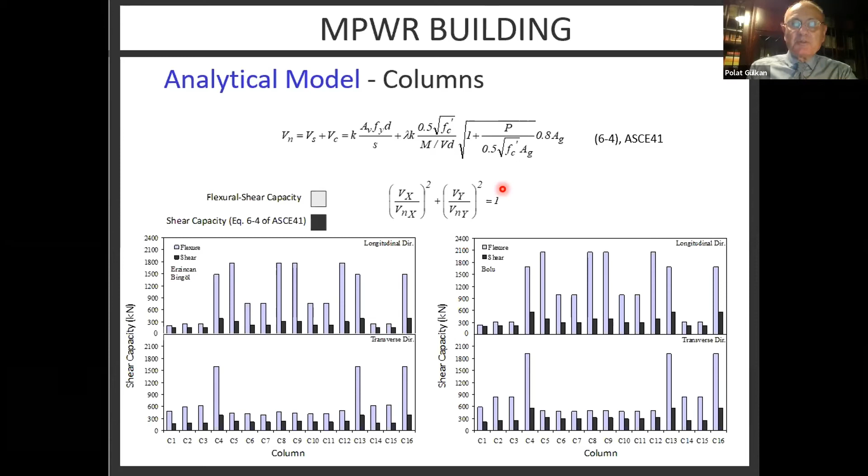Now, the base shear, in terms of the weight of the building, in the two directions of the building, was of the order of 0.25 to 0.3, maybe 0.34 of the weight of the building. Now, this is, of course, a pretty heavy amount of base shear. The Bolu building, the one that was most severely damaged, seems to have possibly experienced a base shear of the order of 0.3, 0.34 times its own weight.

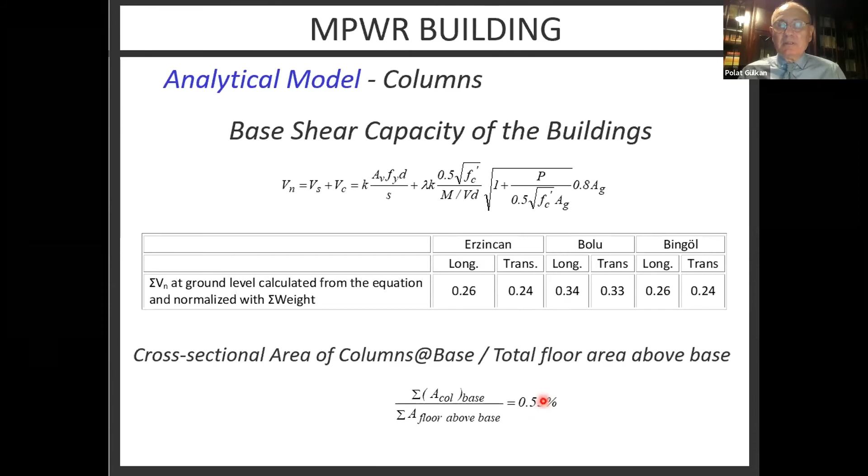And the cross-sectional area of the columns at the base divided by the plan area above the base, the floor, was in all of them, of course, 0.5%. Not adequate, but of course that's only hindsight speaking. We made an analysis both for flexure as well as for shear for the columns. We looked at the infill walls. We made use of the models that have been recommended in the ASCE 41 and ASCE 7 formulations.

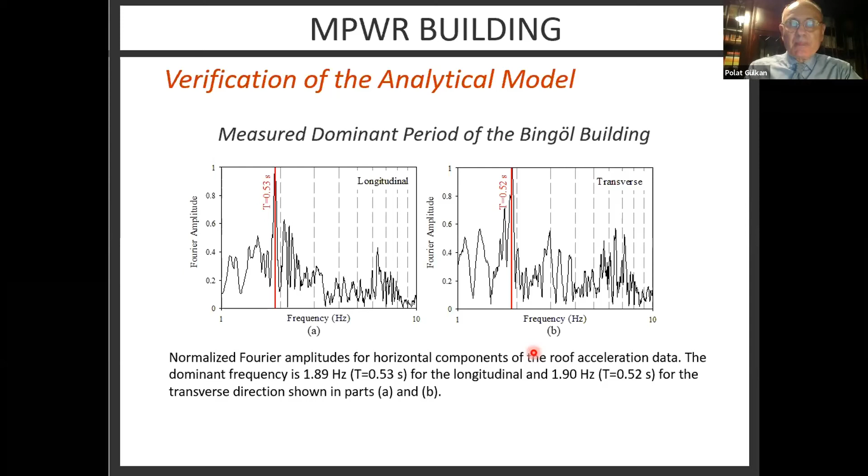And we even were lucky or unlucky enough to experience a minor earthquake while we were visiting the building in Bingöl. We were able to record it for making a Fourier analysis to see what the period was, and the period seemed to be pretty accurately predicted by our analytical models. Right, so it wasn't too bad. We looked at the roof displacement predicted from the performance-based software that we were using, and the roof displacement also did not appear to be excessive.

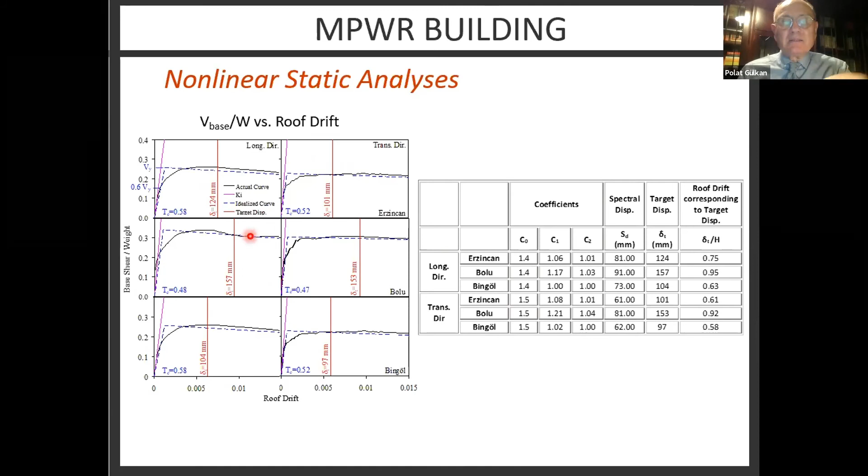We did pushover tests, analytical tests, numerical tests, and that seemed to confirm the analysis on the basis of the shear capacity that we had already done. The story drifts, and finally the evaluation at member level. Right. These damages, of course, were caused by the captive columns, and it is very difficult to make a rational analysis of a captive column because it depends heavily on the confining walls, of which we did not know the properties all that well, but they seem to have had enough capacity.

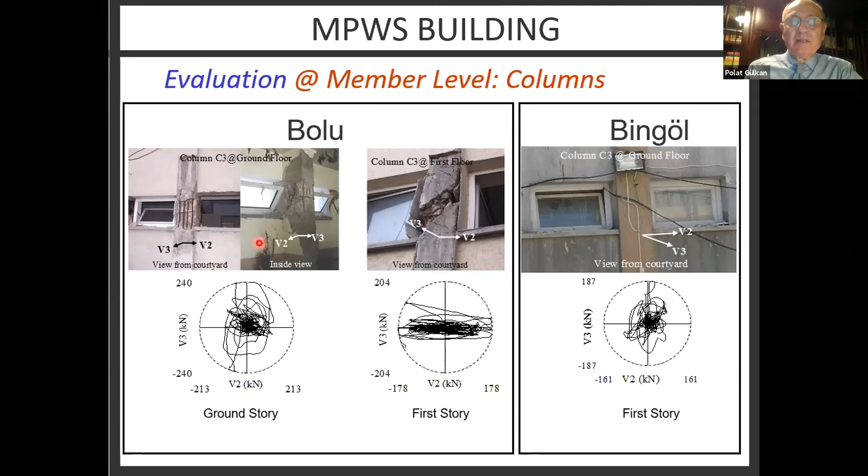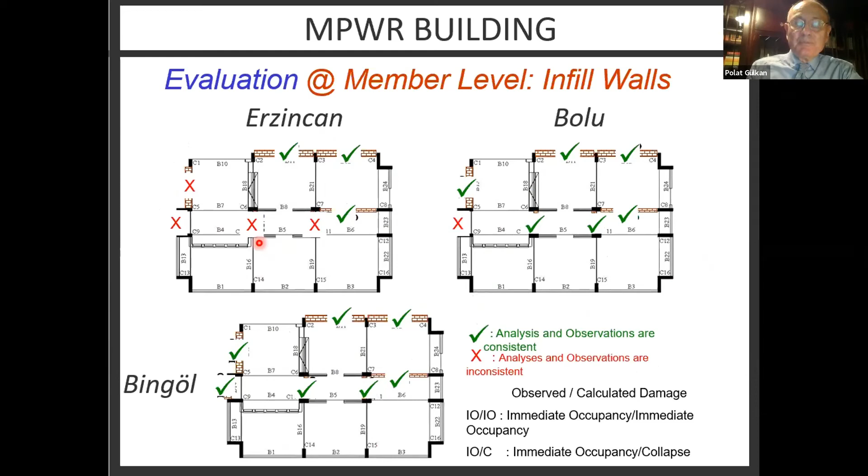The girders, the crosses indicate mismatch between the analysis and the observation. The check marks indicate agreement between the damage in the corresponding member and the calculations. Infill walls, the performance calculations weren't that bad, and I have already spoken at length about the predictions concerning the columns.

So the sobering lesson that we learned from the experience on these three buildings over the course of 12 years seems to indicate that we need to develop finer tools, finer predictive equations for damage. Now, damage, of course, is heavily in the nonlinear range, and it is difficult to make much heads and tails of damage. And I recall in this connection the extensive testing that was run at the University of California, San Diego, on that shaking table on a 7-story model, and the predictions that were made on the basis of the geometry, the material properties, and the other details of the 7-story model, full-scale, nearly full-scale model. Well, some teams were badly off even there.

So before we can make predictions of monetary losses caused by the 2,475-year earthquake, which nobody has experienced, of course, for the benefit of the insurance and the reinsurance industry, I think we should be sober and admit that we have a long way yet to go in that respect. I believe that this is my last slide, but I have already vocalized what the conclusions are.

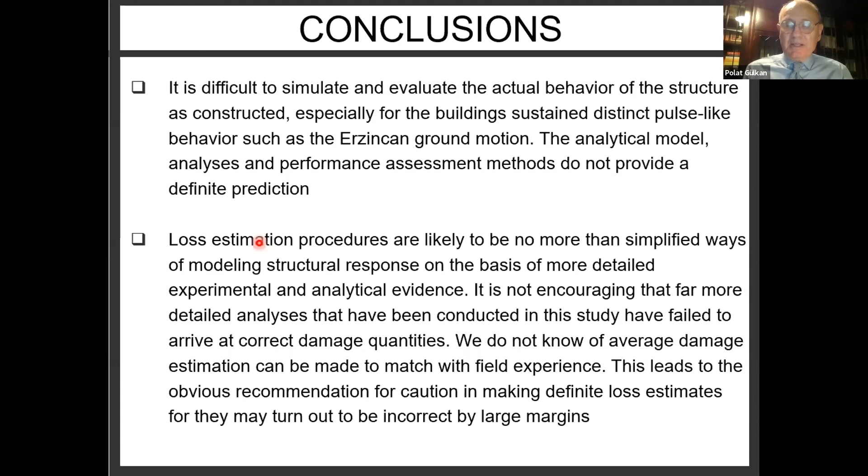So, ladies and gentlemen, I thank you very much for your attention. I'm afraid that this is a somewhat negative conclusion slide set, but I think it is also beneficial to be modest in our claims. Thank you very much.

Thank you, Polat Hocam, for this nice presentation. And are there any questions at the moment? Hi, Alp. It's Khaled Mahmoud. Thank you very much, Professor Polat. It's a very, very informative presentation, and we appreciate you for that.

I would like to ask you, after the late 90s, I think it was the 1999 earthquake in Istanbul, there has been a wealth of knowledge and developments in the seismic area in Turkey. What, in your view, stood out of the Izmir earthquake and the catastrophe that happened there? What did stand out? What surprised you the most about what took place there?

Well, is this Khalid? Yes, this is Khalid, Professor. Well, nice to see you. Nice to see you, sir.

Thank you. Well, the lessons, Khalid, that these earthquakes, including the experience in Istanbul in 1999, point to first and foremost are the fundamental errors that the community of civil and structural engineers in this country commit time after time. Only 2.5 weeks ago, there was a strong earthquake in Izmir, and 6 buildings, 6 multi-family condominium buildings have collapsed there, killing a number of people, 116 in fact.